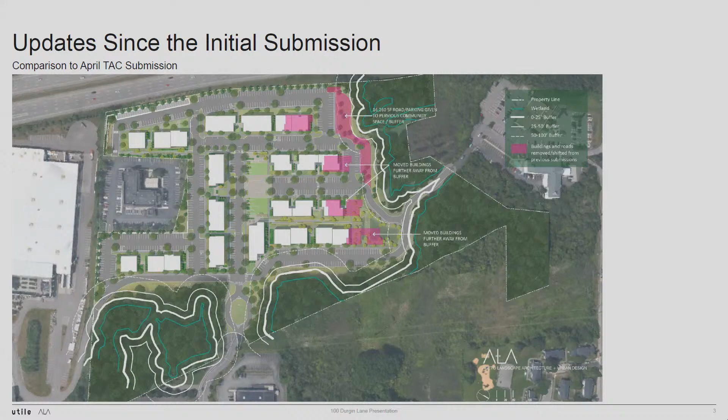Next slide. We also wanted to back up a little bit and review some of the site constraints here. This is something that we showed all of you in our informal session a number of months ago back in February, but wanted to remind everybody of some of our constraints. So of course there's a property boundary.

There are a few easements on the site, primarily access easements to the north and to the south. To the north heading off to Motel 6, to the south heading off to Home Depot. On the east, the connection to Durgin Lane, and then there's the Hampton Inn that's kind of surrounded by our site. There are also a number of wetlands outlined in green, and of course the buffers associated with all of those wetlands. Finally, that zone of red is the power line transmission easement as it sits relative to our site.

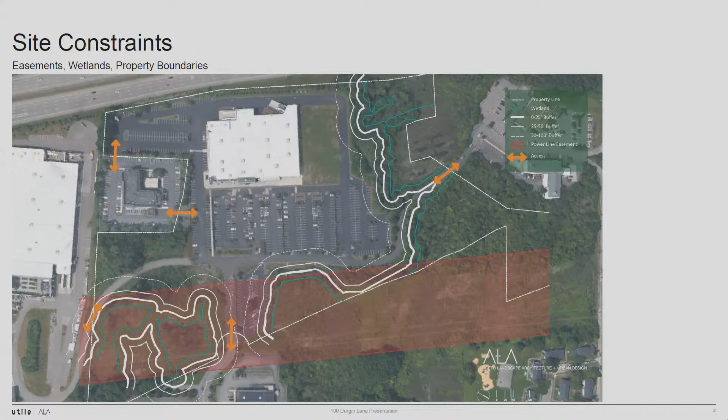Next one. Coupled with that, Peter, if you wouldn't mind going back and forth once or twice just to highlight the difference between the big box store that's there now and the kind of sea of asphalt compared to what we're proposing here.

So not only is there improvement within the buffer zone, but overall there's 34,000 square feet of new pervious surface weaving into that asphalt parking lot and the big box store, really trying to create a network of open spaces and reduce the heat island effect of this big box retail development that is no longer a functioning site.

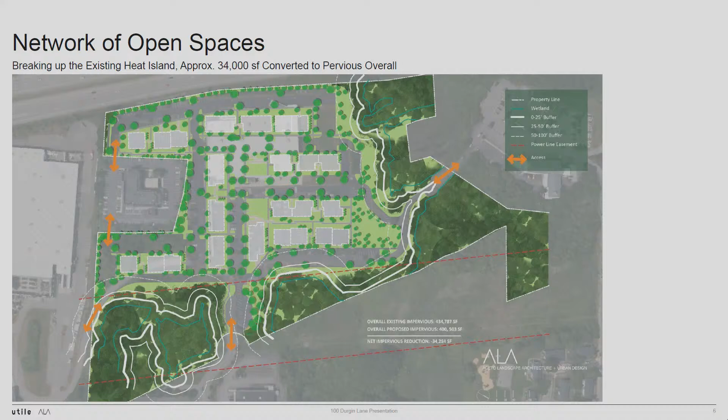Trying to turn this into a much more livable, breathable, sustainable site plan for the city. This is our proposed site plan, one that we consider very sensitively scaled development, one that is market feasible in terms of the number of units, the parking, the connections, the amenities of the space, but one that provides a lot of benefits to the city through community spaces and lower impacts to the buffer zones. I'm going to hand it to Nick to talk about some of the community spaces over the next couple of slides.

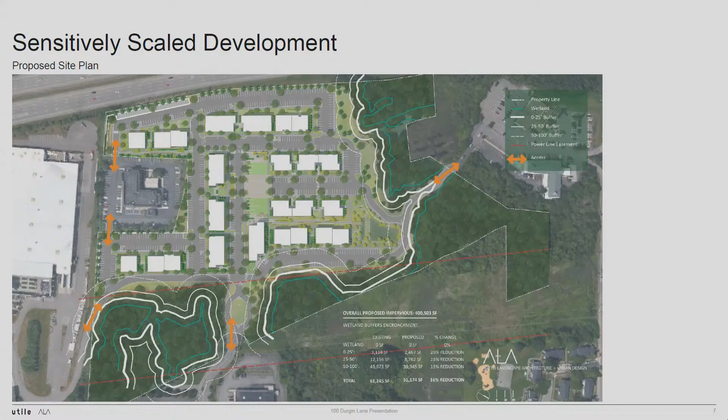I'm Nick Aceto with Aceto Landscape Architects, and these next few slides I want to cover the landscape design intent. This slide is highlighting the active community space zones. We have active and passive community spaces on this plan. The active zones are primarily concentrated interior to the site, with a more structured landscape design to create a sense of outdoor rooms, and active programming such as benches, places to sit, larger paved areas for gathering, more manicured lawn spaces, and a dog park, for example, down on the plan's south portion.

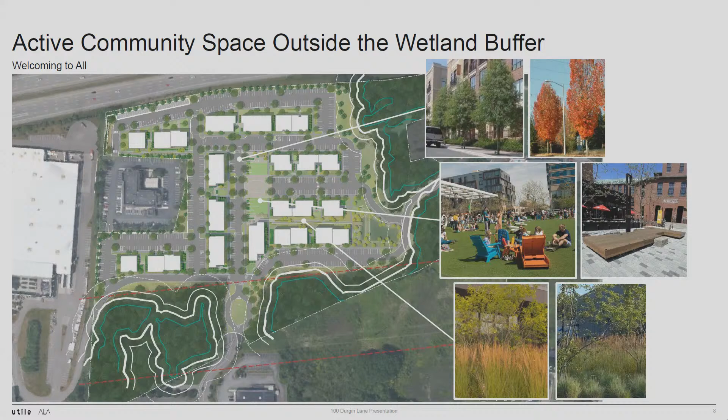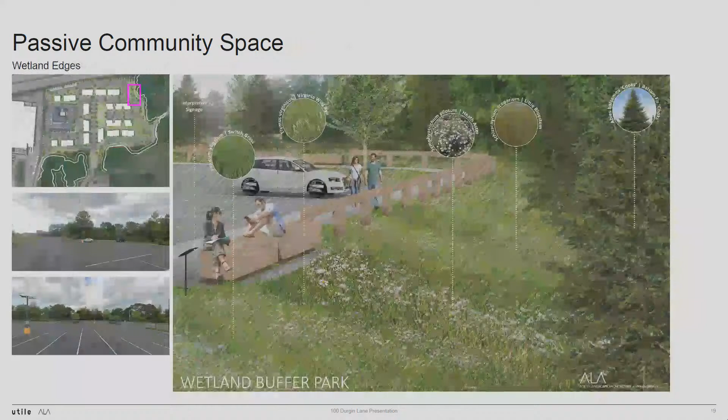Next slide. This is zooming in a little to the wetland buffer park area, an example of that landscape character within the passive community space up toward the northeast corner. You can see some of the ways we're managing that space—the wooden guardrail, the bench, some interpretive signage. A lot of that landscape will be slope topography, with a more native, natural wildflower and grass character. The intent again is for quiet enjoyment, walking along the edge, and habitat protection.

We're also using evergreens, along with the wood guardrail, bench, and signage, to help delineate that space from recreational usage. The next slide zooms back out—you can see the buffer park area and the guardrail in the background of this shot. This area is looking at the rain garden park, a bit more of a programmed space with more activity incorporated, including the observation deck.

Over the rain garden, which also serves as a stormwater feature to treat and detain some of the stormwater on site, but with a similar character to the buffer park—naturalistic plant character, kind of a native meadow character, with lots of switchgrass and native perennials for color and interest. The intent again is quiet enjoyment, passive usage, no recreation, due to slope topography, incorporating lots of native plant species. It's also worth highlighting, down in the lower left, the character of the existing condition today—those two images show a similar location where today it's a large surface parking lot with the buffer pushed out toward the periphery on the right.

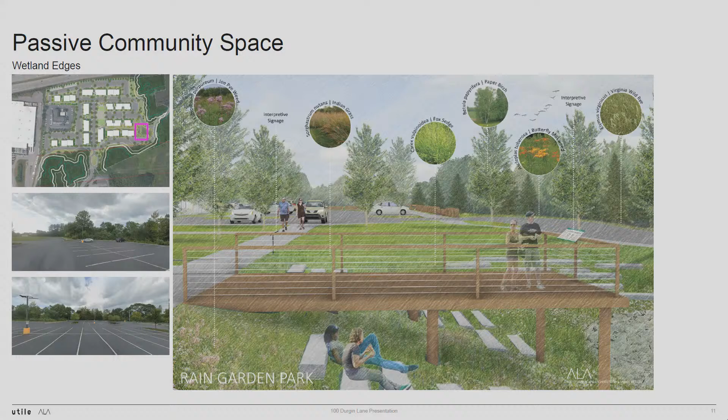And those seating areas won't be a problem for mowing and getting around in there? Are they going to be all right? And then the edge of it, I think on the last slide before that, there was the guardrail. I don't know if that's new, or to keep people out of that buffer like they were talking about. That's a new improvement, that looks good to keep people out. Discourages it at least, I don't think it's prohibited completely, but it reduces that foot traffic people were concerned about. That looks good to me.

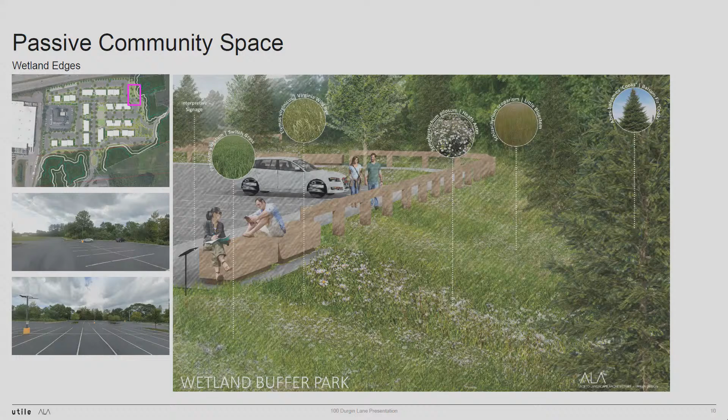Peter, just to add on to that, you're correct regarding the boardwalk, as that came out of the design in favor of the observation deck. We've also, as previously noted, pulled out the portion of the rain garden closest to the buffer from the community space, so that zone has been removed.

In earlier conversations, I wanted to underscore that within the existing site today, there's about 60,000 square feet of impervious area within the buffer. As Brett noted, we're reducing that to about 50,000 square feet, so that's a 17+% improvement and restoration over existing conditions. In addition, 34,000 square feet on the entire site is being converted from impervious to pervious surface, so just shy of an acre of the overall site is being returned to pervious materials.

Great, that's great. There was one of the first bullets about the landscaped islands. Isn't that the regulation that says every 10 spaces you're supposed to have one? I was looking for it, didn't get to it yet. The island for every 10 spaces is in the character-based zoning, not in this one. That might have been confusion - that's citing a site plan regulation as well, not the zoning. So we're complying with the site plan regulation 6.6, and that's sufficient. Okay, yep.

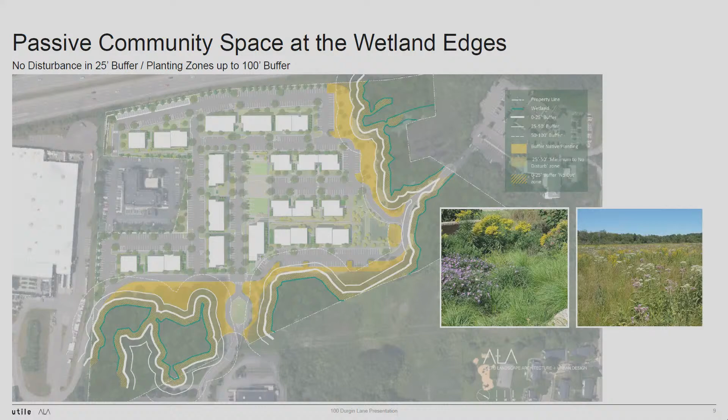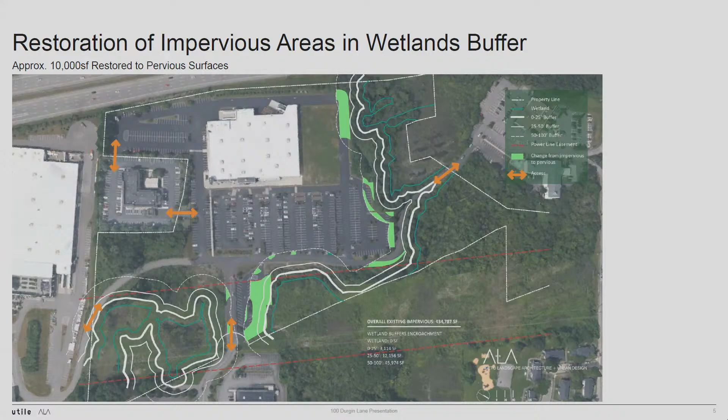Another question - my screen keeps freezing up, I can't quite see, but the parcel lines or lot lines, are they going to be reconfigured so they won't be going through a building, so you won't have to have any sort of agreement? Yeah, that's correct, it'll be very clean, every building will be on its own parcel, and all the lot lines will not be running through the buildings. All the existing access and utility easements will get cleaned up and reconfigured for the new roadway layout. Those are depicted graphically as part of the package, and they'll be formalized once we get site plan approval.

And probably Shanti, in terms of the building code treatment, there will be imaginary lot lines drawn between each of the buildings to dictate fire separation distance and those types of things. Okay, yeah.

Just to note, I know there's been a number of questions related to the easement agreements. We are continuing conversations with our abutters, and those conversations are moving along smoothly. As Neil alluded, our intent would be to record those easements as a condition precedent to the building permit, but not before the approvals are issued. We're happy to share any additional documentation beyond the easement agreements or proposed easements we've submitted, let us know if there's anything further that would be helpful. That's typically right, the process is, as you stated, later you'll have to record them. But we need an easement plan showing all the easements, and the most complicated one is going to be all the cross easements for utilities between the lots. Yep, we're going to need to see that too.

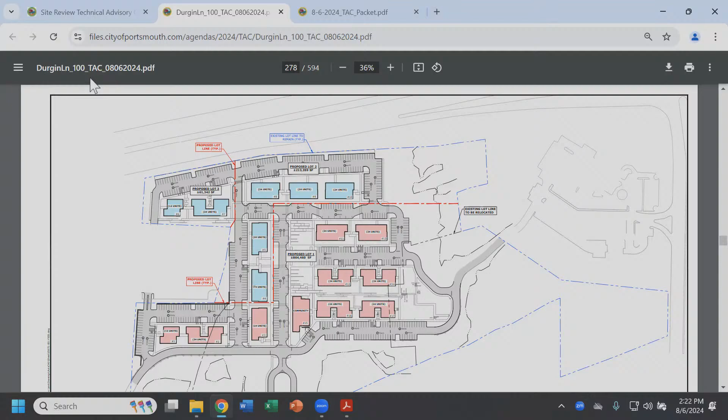And I believe we have that, but yeah, they're in the plan set, towards the end of the site plan set. There's separate sheets for access easements, utility easements, and community space easements.

Yep, all three. And if it's helpful, we can certainly set up a separate meeting to go through that in greater detail, to make sure it's clearly depicted between the various components, so that there's no confusion there. When you submit the final set, we'll review them, we might have questions before that. That's good to catch before that.

Just a couple of things before you go today. One, I know it's been an extraordinary effort trying to get Weston & Sampson under contract, and we apologize for that. But so you understand where we are at this point, the department hasn't even started reviewing your plans yet because we've been waiting for Weston Sampson's reviews. So you don't have any of our engineering comments yet. Those will be forthcoming as soon as we can get the baseline Weston Sampson reviews going, which should be soon. That's point number one.

Point number two, I'm still not happy with the access to the hotel over by Building 1. I think the hotel should have its own driveway off the access road, and I'm going to maintain that position through this entire design process. So we can either agree to have friction throughout the entire thing, or we can look at doing a redesign in there.

Neil Hansen is here from Tighe and Bond. They've created many of the documents for the proposal referencing the land use, positioning of the buildings relative to easements and lot lines, traffic patterns, and other items needed for the request.

Clint Darnell was not able to attend. Brett Kelly will be stepping in for any questions relating to the buildings themselves. Brett is senior vice president of Kodiak Building Partners, the owner of Portsmouth Lumber, and he's very familiar with the building process of our structures, having done similar buildings across the country.

As everybody on the committee knows, we've been working on this for quite a while. This dates back almost 2.5 years to the first phase of our project, building those 2 prior buildings on the back of the property and taking down some old wooden sheds. We're on to phase 2, to remove additional old 1980s wood structures that are inefficient for our property and replace them with new modern operating structures.

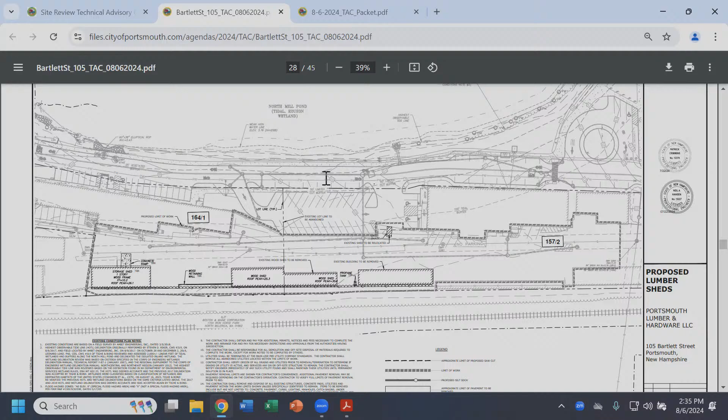In our original proposal, we had asked the committee for an exception to build a barn that would overhang the easement for the sewer going through our property. After much hard work by Tighe and Bond and their associates, the soil conditions did not lend themselves to doing it efficiently without putting significant foundations into the property, well beyond the scope of what we were budgeting for the project.

So we have since removed anything that has easement impact and moved the new shed barn, as we're calling it, off the easement. Neil will address the exact footage, but I believe it's about 10 or 11 feet, the closest impact we would have to that current easement, so we're quite a ways back.

As noted, the building is in the position and size to specification the city allows in the character district, along with the variances that have been granted to the property.

Our operating hours and the way the new lumber sheds will be constructed, they will not require any lighting at all. They'll have light panels around the exterior, which will allow light in during operational hours.

The stormwater separation will be addressed during construction of these buildings moving forward, so we minimize the impact to the yard and the parking lot, and Ed will address that in a few minutes.

There are, and there still are, 3 exit points and entry points in the yard. Tighe and Bond has addressed in the submittals the fire access routes and the truck entrances and exit points to show where the allowance is.

There will be no change to the exterior lighting. Whatever exists will remain, including the pole lighting and the lighting that's currently on our buildings.

We did look into the fire suppression requirements and have researched that. I submitted that to the committee in the documents. I look forward to any comments on that if there are some. I did quite a bit of research, and as far as I can tell, we are in the district for the building type of storage.

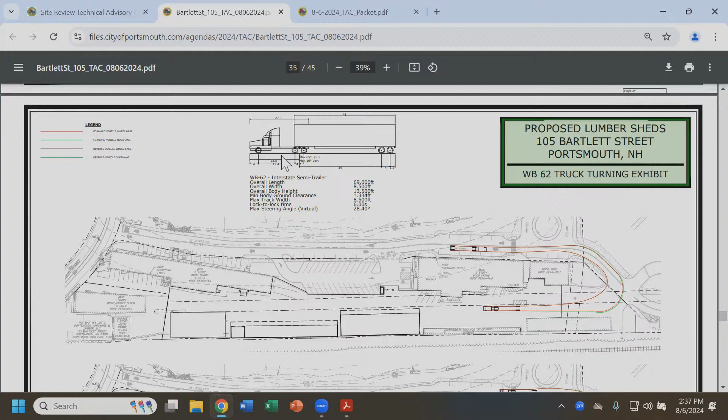Neil and his team have explored whether we exceed the distance required for construction near the railroad tracks, and I believe we are over 35 feet from the nearest point of that operation. The existing fencing will remain as is, and any new fencing will conform to city requirements, or we will seek a variance for approval for any changes in the fencing lines and heights.

The new buildings will be constructed of steel racking, steel beams, and steel panels on a proper concrete foundation. The current buildings are old wood, technically a fire hazard, and are just at the extent of their lives.

In the comments sent to us on Friday, one of the comments was about the green building statement. I did a bunch of research on it, and I actually wrote a statement which I will supply to the committee at the end of the meeting. I can find this construction will have no impact on the water, air quality, energy, or services that we require for the property to use. Theoretically, these buildings are stagnant buildings in the open air.

And let's see what else is.

I'll turn it over to Ed to talk about the stormwater separation, the railroad commission, and some other items. We have a large project of apartments that will be started, I believe, at the end of the year behind us, and in coordinating with that project, we're going to separate the stormwater from the city sewer. That's in the plans, and I think everyone's pretty familiar with that.

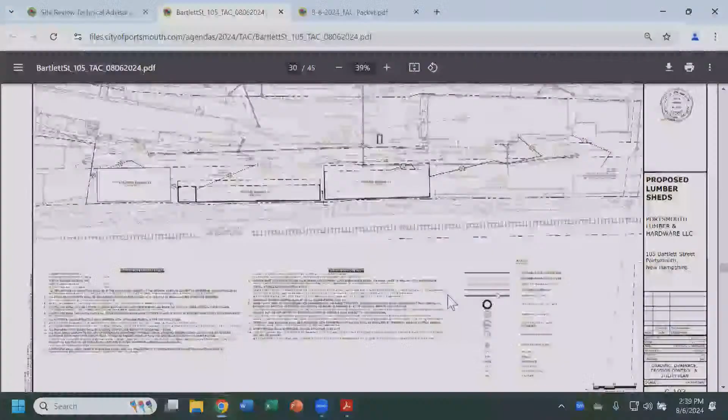Yeah, that should be fine. And what else was it? The lot merger. That's something that's acceptable to me as the property owner, or we could do a lot line adjustment perhaps, so that we just take a little bit of land from the lot on Bartlett Street and give it to the other lot to make the setbacks work, or whatever this committee thinks is more appropriate or easier is totally fine with me, because this is going to remain a lumber yard for a long time, so it doesn't really matter to me one way or another.

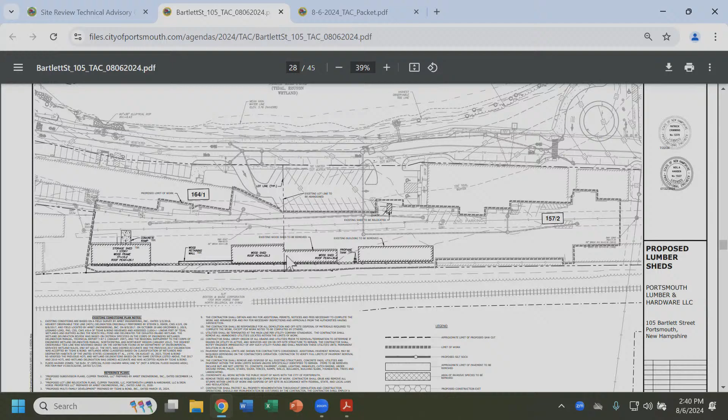I'll have to talk to Neil about what's the easiest thing for you to do. The issue, Ed, was that this lot line was going through that building. Right, okay, so we thought the easiest thing was just, if you had no problem, to merge the lots. This proposed plan shows the lots being merged. Yep, that was the issue. Okay, all right, do you have any questions of me at this point?

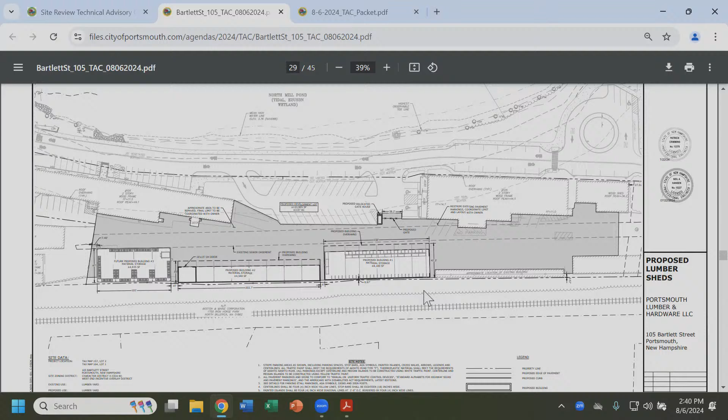The railroad company, which railroad have you been dealing with? Now that CSX has bought Pan Am, have you had any dealings with CSX? I have not personally, but it's the same people, just a different name. They used to be Pan Am, and before that they were Boston and Maine. It's different people, but I know other projects abutting the railroad have had difficulties with them. I've talked to my good friend in contact, and he said it's still the same, the people that deal with the real estate part of it are the same. Yeah, just wanted to double check and make sure.

You may have already said this, and I was digging into the plans when you were speaking, but with respect to ongoing repair and maintenance on the backside of those buildings, because you'll need to periodically get back there, but you'll be on the railroad's property, right? Is that where the easement comes into play, some sort of permission in perpetuity? No, basically when we build them, we have to go onto their property to dig footings and so forth. Once the building's built, there'll be a couple feet, I think, to be able to work. They're steel-sided buildings, so they're not going to require much.

Just painting every 30, maybe 40 years, something like that. Yeah, exactly. So they're kind of like set it and forget it type buildings.

So then there's a dimension that wasn't clear, it shows .97 feet as a distance in proposed building number 1 to what appears to be the property line. So it gets pretty close in spaces.

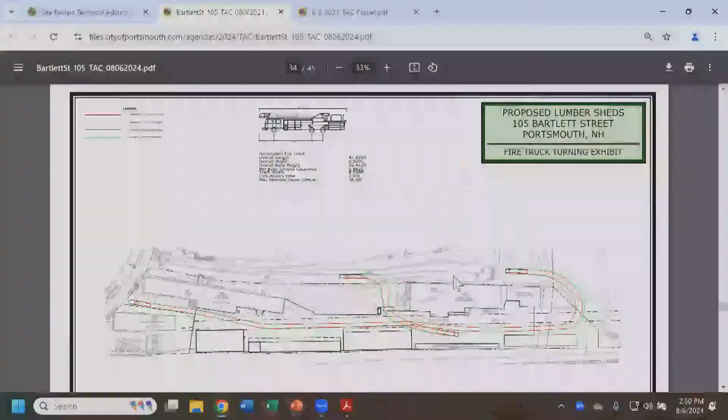We submitted the fire truck showing entry through the middle gate and from Bartlett Street. WB62 can make the turn in and out through the rear, and a WB67 can come in from Bartlett and out through the rear. Maybe I got that backwards.

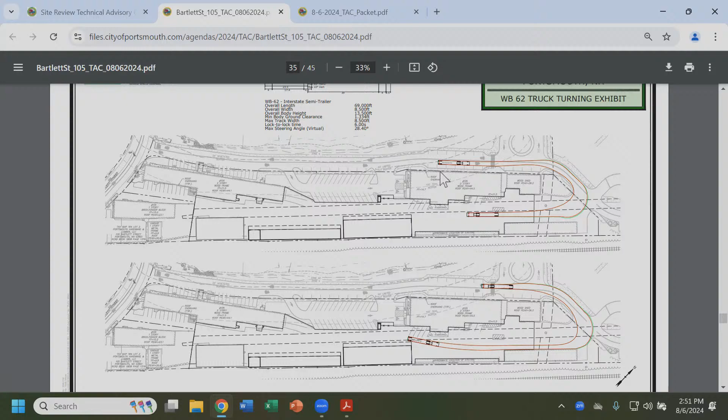In from the rear, so when you get deliveries, what's the traffic pattern going to be? That's the question. Fire truck I'm not concerned about because the 62s are much bigger than the fire truck, so the 62 would need to come in through the rear of the site. Okay, so what's the normal delivery size? 62 is the normal delivery size, the lumber deliveries. Okay, so that's going to come in the rear gate as a matter of course, and it's going to exit on the other side. It's gonna go straight through.

You show it exiting on... you don't show it exiting onto Bartlett, but. Yes, they do, it's on sheet - I don't think we did because it's an existing condition that's done now. It shows the fire truck. Will it exit the same way the fire truck is? Yes, yeah.

Why does it have to come in the main driveway then? Why can't it come in the other way, if it can go out that way? It can come either way, yeah, I guess technically. The curb line on the rear isn't wide enough for it to make that left turn out, going left that way. Well, the program can't make it. I'm sure a skilled truck driver could - it's like inches.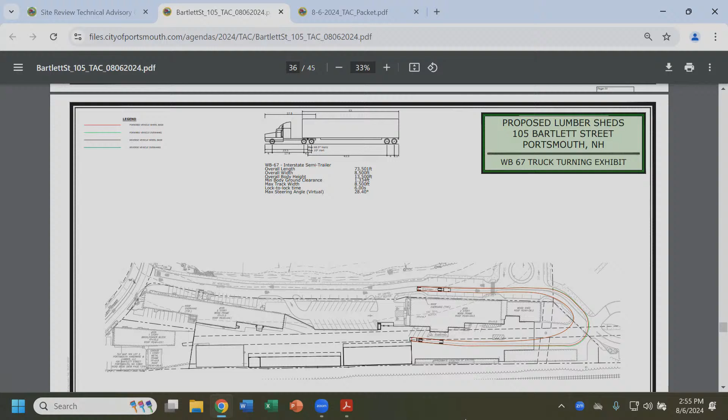Well, if you can look at that and see if you can get a little bit more room at the rear there. Seems like you should be able to do a left if you can do it. Yeah, it should be a pretty minor adjustment. So we shouldn't have any problem making that revision to get it to work.